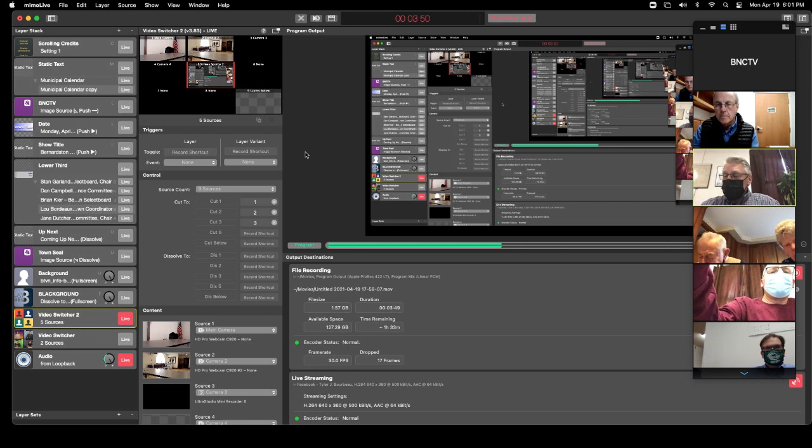The purpose of tonight's meeting is to go through and explain real quick what the plan is for a new fire station, and to update people on what the process will be going forward through town meeting. Hopefully we can get participants to show up to voice their concerns, and maybe even tonight have participants voice their concerns and let us know what they're thinking.

I believe we've worked diligently on trying to get a plan to put forward for the town. What we're going to present tonight is the proposal we feel is our final, best effort of trying to get a new fire station, as well as using the existing old fire station. With that, I'd like to turn it over to Brian De Vriese to update us on what he has.

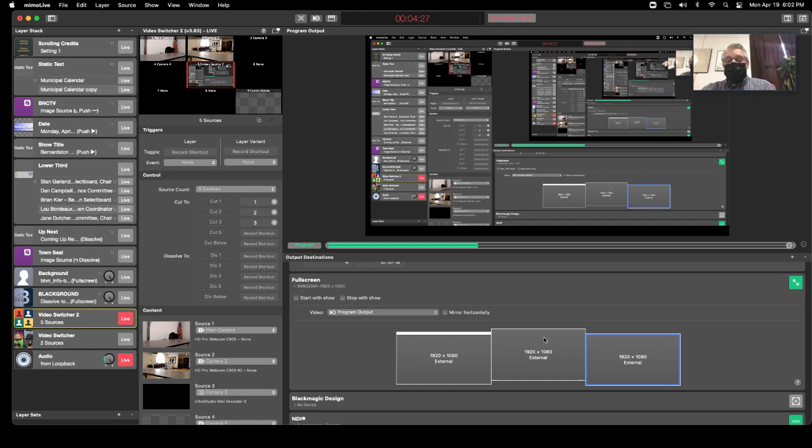The buildings are separated by 30 feet because there's a culvert, an 18-inch culvert pipe, that runs between the two buildings and diverts the stream across Church Street into the stream on the other side. This scheme utilizes land owned by the town, so there's no additional expense for purchasing land.

Among those mitigation measures are planting wildlife habitat and removing invasive species, which would be done on the property across Church Street. If you look directly from the garage doors in the old station across the street, you'll see a parcel of land there, and that's where the mitigation would take place.

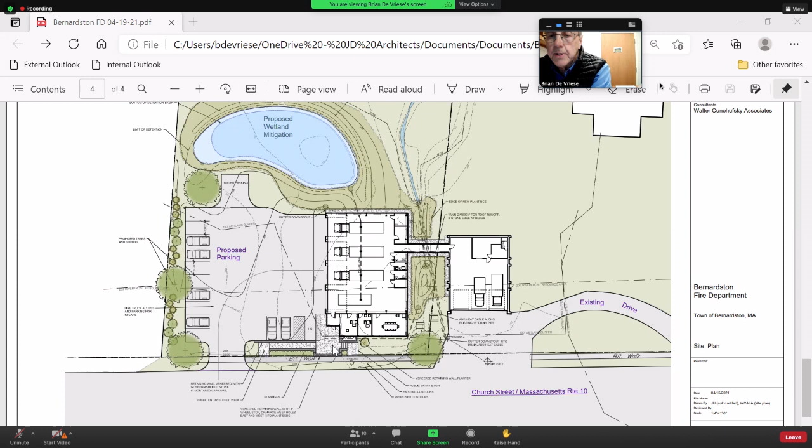Before I go, there was a question about needing a ramp to enter this station because it's raised. We have about a 3% slope here in this area, which would satisfy the need for a ramp. Then we have a stair from the existing sidewalk to a landing, and another stair up to the entry area of the existing building.

There's a retaining wall around this raised landing we're proposing. It would be a Goshen or Ashfield stone veneer on a concrete retaining wall - a short wall, only 2 feet high here at the sidewalk.

That would allow a wheelchair to get in there - you'd go up the walk to this area, and that's a 3% rise, so you don't need any handrails on that. It's a very gentle slope.

There's a handicap parking area right here near the entrance to the building. The entrance goes in right here - there's a foyer, the dispatch office, the chief's office, and a conference area. The conference area is 24 by 16.

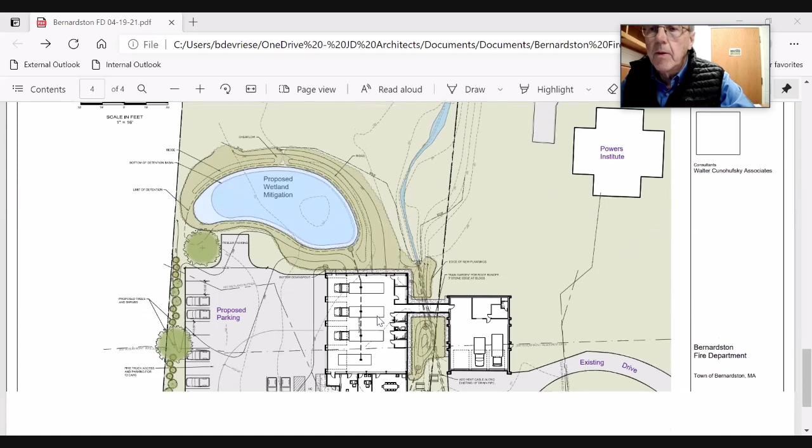I'll start with a plan. Okay, so we have the new station here, here's the ramp. We have the HVAC room, tool room, toilet room, laundry, another toilet room, and a shower. In this area, I'm proposing turnout gear, but it can go other places too.

We have 4 bays. There's a large rescue trailer that needs to be housed undercover, so this is a good opportunity to house it. I'm proposing that the brush truck and squad truck—well, the chief suggested parking the squad truck and the brush truck over in the old building.

This is the foyer we were just talking about, dispatch office, chief's office, and conference. We're leaving the existing fire station as is.

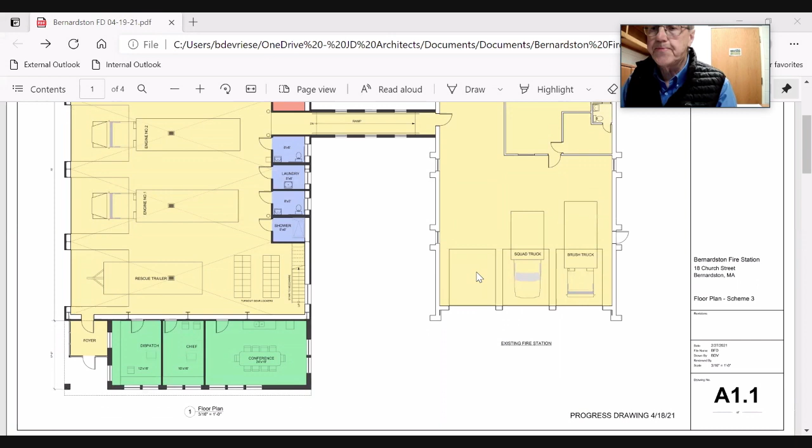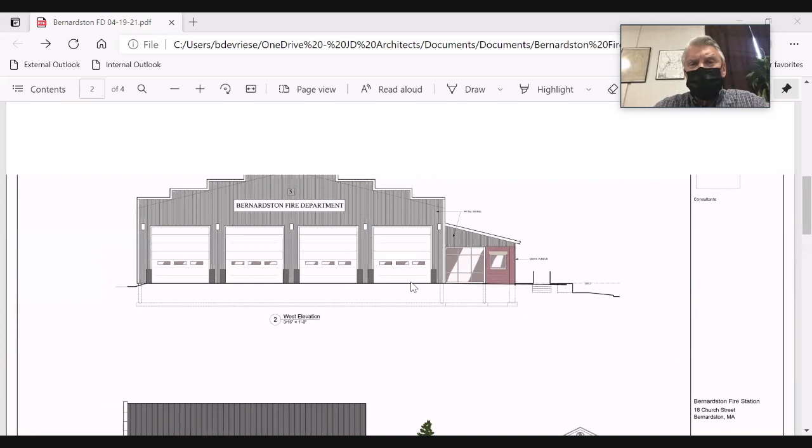Going back to the front of the building, there was discussion on the roof line of it. People didn't like that cut out. I just want like a gable. Yeah, that's a matter of preference, and that discussion can come in the final design.

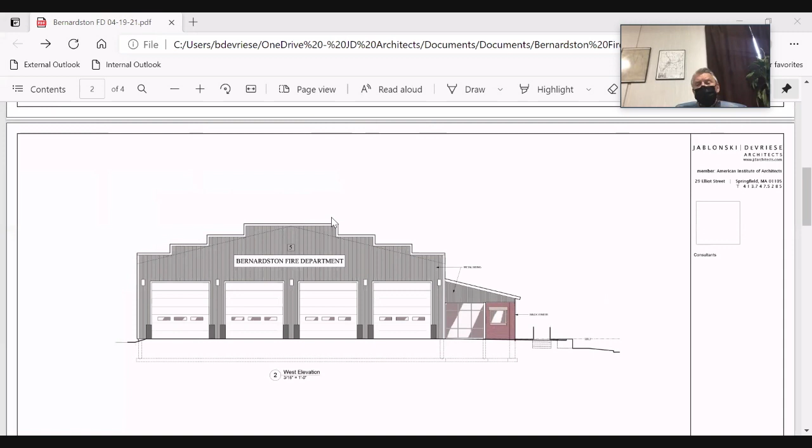This is a feasibility study, and this is a suggestion of a way of making it an interesting looking facade rather than a straight gable. So the people could decide at a later date how they'd like to have that look. If the majority opinion is against that, then that would change. Okay, very good.

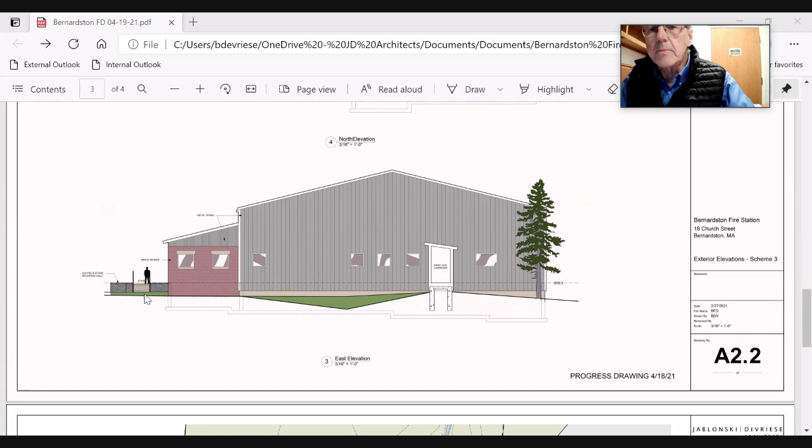So that's briefly what it's all about. I think the advantages of this scheme are that it uses the existing fire station, it uses existing town-owned property, and it keeps the fire station in the center village.

Do you have any updates on cost for us with everything that's been going on? Well, no, I don't. I've got some calls into contractors to see what's happening. Mostly it's materials that have gone very high during this pandemic, and also some price hikes are the result of the tariffs that were enacted a couple of years ago. But I think once the pandemic is over, the pricing will settle down again. Right now it's kind of volatile.

I don't believe it would affect—the next thing you have to do is secure the services of an owner's project manager and a designer. I don't think the cost of those services would be affected by the pandemic. It's just material prices right now that seem to be going crazy.

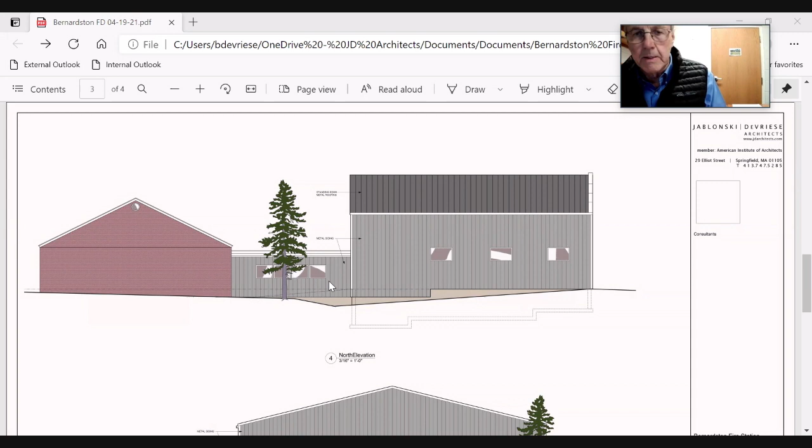Could you explain to us what type of person that should be, or who it should be? Well, this person is generally a contractor. A number of contractors offer these services—I know DA Sullivan does, and there are some companies that specialize just in the role of owner's project manager. It's something a general contractor—well, you can get qualified to be an OPM through a program, but there are quite a number of them around.

Are you qualified? I am not. I could be qualified, but I have not taken the course, I have not done the coursework in that. Okay, there may be people in town that are qualified to do this, or could look into it. I can make recommendations on OPMs too, if you need that.

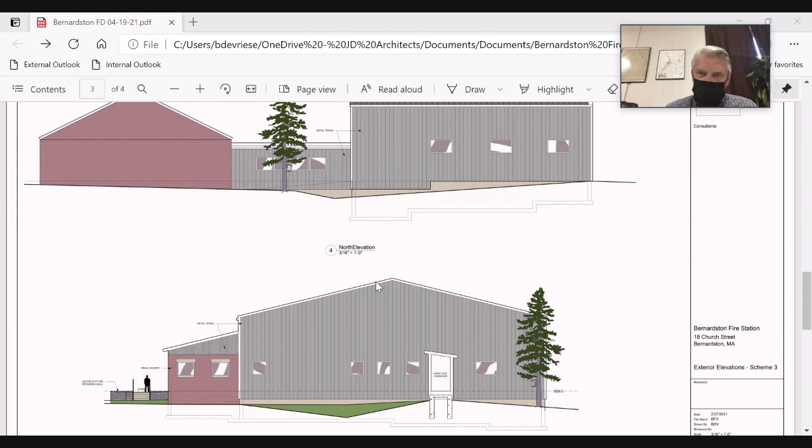So what we haven't completed on this plan here is the septic. Is that correct? That's correct. Now, we could use the existing septic if we put a pump up. Am I correct in saying that?

Well, if it turned out that you failed your Title V inspection on that existing system, then you might have to look for an alternative, like pumping up to the senior center. I think you mentioned that earlier. Yeah, that would be a more expensive proposition. Okay, sounds good.

Now, going forward, the notice of intent. Yes, you've been working on that. I have. That's contingent on completing this plan, which shows a greater coverage of building. I mean, there's more of this building in the riverfront area, so that has to be compensated for.

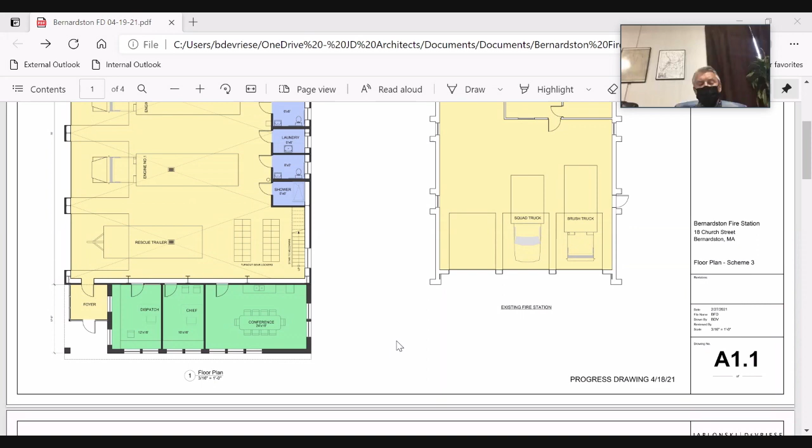Bill Luttrell is working on the notice of intent narrative, and we have to get a stormwater management plan developed too, which I was going to reach out to a civil engineer on. Walter Konofsky did the site plan and all the grading work on this design, but he prefers not to do the DEP forms and applications.

Would there have been a stormwater plan done previously with the plans that we had somewhat done years ago? I don't know how far you got with them, but I assume not. I don't think you would have done that until you actually started to move into the final design work. That's what I was thinking, but I wanted to be sure because I heard somebody say they thought that was already done. No, I don't think so.

I didn't see any evidence of that. And it would be contingent upon what plan you develop, like the amount of hard surfaces you're creating and how much volume of water you're going to have to manage. So I don't think it would have been relevant anyway. You'd have to redo it, even if it was done. But I would tend to doubt that anything was developed that far.

Okay, is there anybody in the audience that might have a question for Brian? If you do, just speak up and we'll hear your question. Okay, hearing none. What else do you have, Brian?

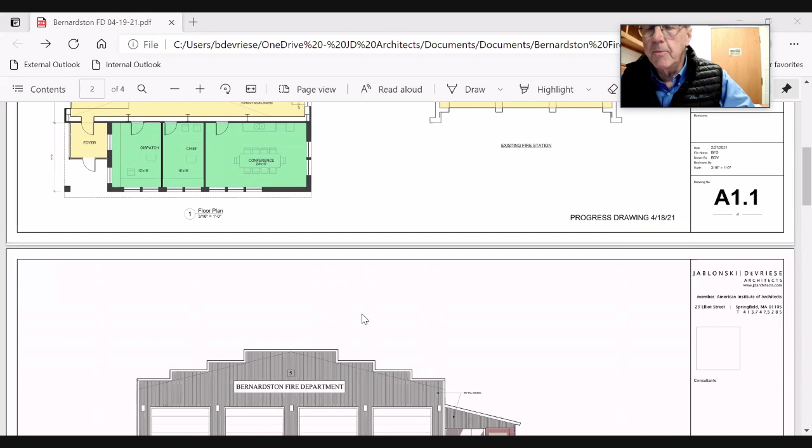I don't have anything. We're continuing work. The next thing I'm doing is moving forward with the stormwater management plan, and any feedback I get back from you or the fire department, I would take into consideration on revising the plan or explaining anything that wasn't clear.

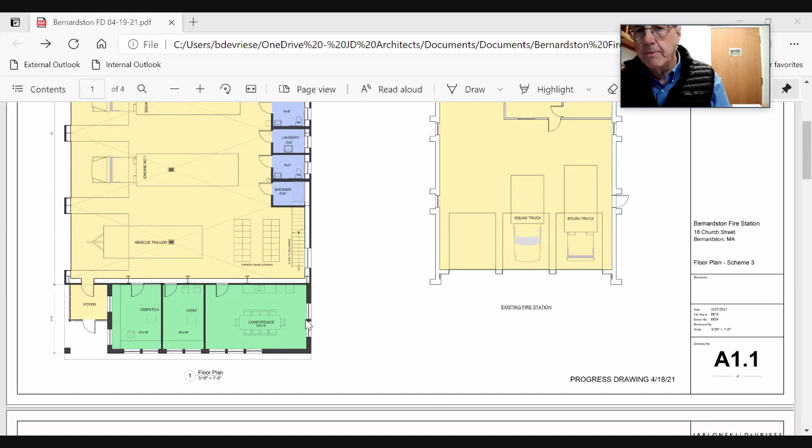Also, the cost figures are pre-COVID. I did escalate them for the addition of the administration area, but they don't really reflect the COVID impact on material prices.

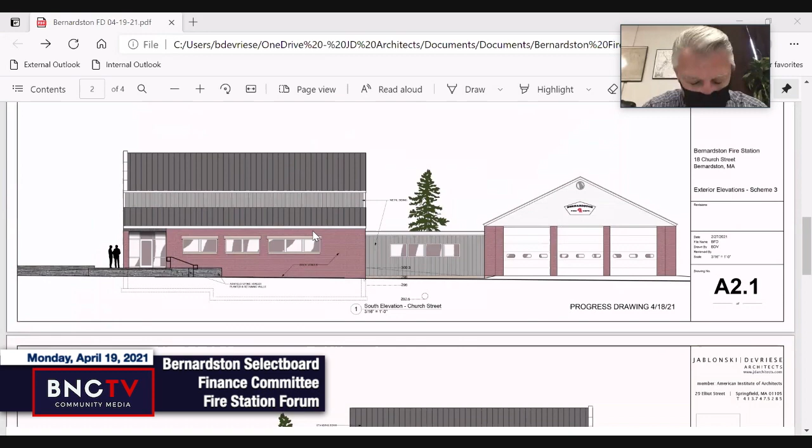Okay, is there anything in this plan that we could use COVID relief money for that you could think of? I can't think of anything. I mean, it's possible that there's certain equipment the fire department might need that could be supplied by that, or you might want to look at a generator.

Yeah, so we definitely want to look at a generator. We feel that's pretty much a must-have. That's not a need, but a must. So we definitely need to look at that.

Now the solar panels, again, we could do something with that later, or during the construction, correct? That's correct. If you intend to add solar panels, your electrical service may be impacted. So you probably want to prepare for the addition of solar panels in your design anyway, for your electrical.

Okay, we're trying to move forward a little bit quicker than we have in the past. We have a meeting planned for May 6th, a Thursday night at the barn at Kringle Candle. And at that meeting, we're going to present it to the public for a vote to see if they would go along with this proposal, and if not, to see what they would go along with. Okay, so we'll have to get that word out.

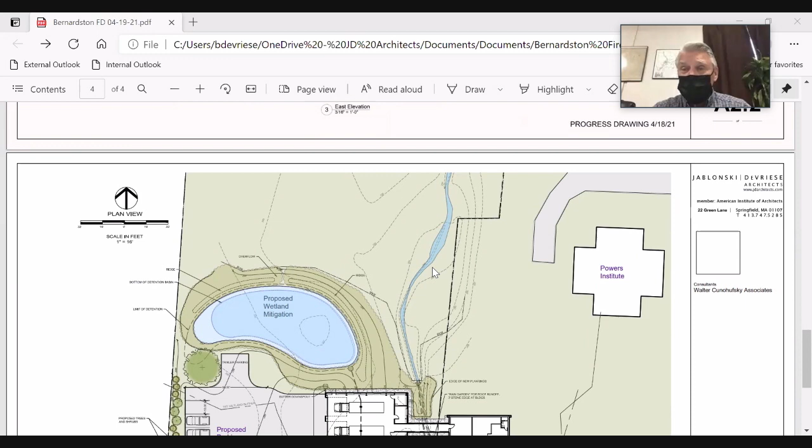The presentation that you presented tonight would be great at that meeting, because I think you explain a lot of stuff that we would probably miss as you went through the different drawings. So I think if you could attend that meeting that night, I don't know if that's possible for you. I think I can do that. I'm just checking the calendar right here.

We're really trying to get the townspeople to get involved, to get behind us, however they feel, but to turn out so we can bring this project to an end one way or the other.

That's our hopes. Looks like I'm clear on Thursday night. So what time was the meeting? 7 o'clock. Yeah, I'm good for that.

Are the select board members or anybody else in this room have anything else for Brian? No. I got one question. Pete Shedd's got a question for you. Sure.

I don't want to change the layout, but I just wonder, would it be better to swap the bathrooms and shower with the area where the HVAC and tool room are? Sure, I don't have an issue with that. It'd make a more direct route connecting to the septic system. That's certainly possible. I don't know if there's any requirement on how far away the bathrooms have to be from the office areas or anything like that. I'd have to check the plumbing situation.

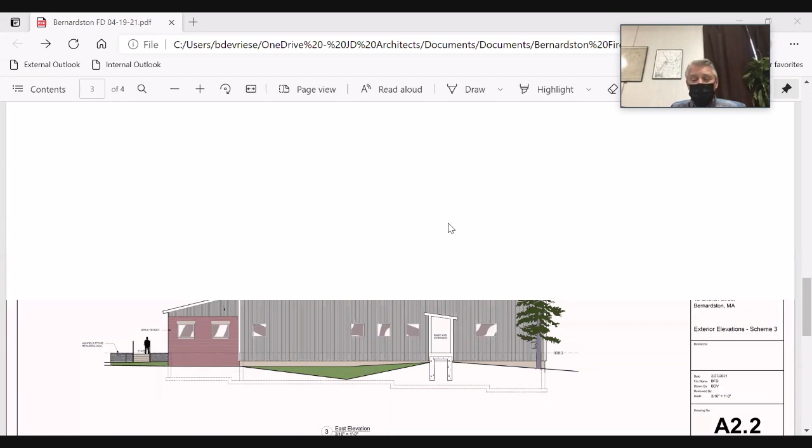Peter, I'm going to turn it over to you for a minute to see if you want to explain to the people the need for this, what we've been trying to accomplish, how you guys are working now, and how this will at least improve what's going on at the current time.

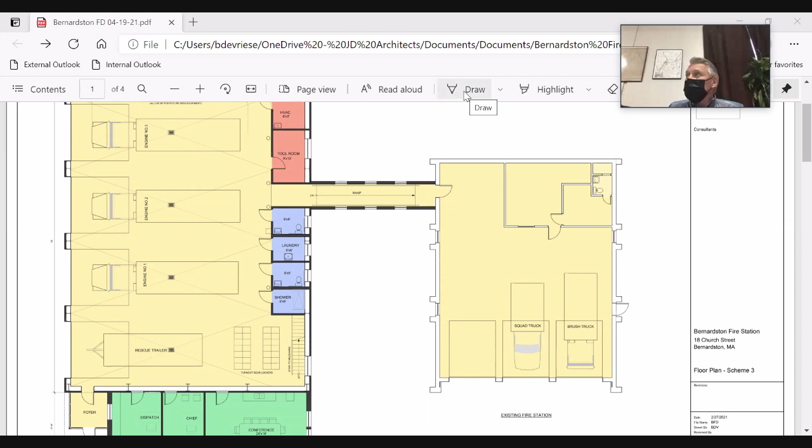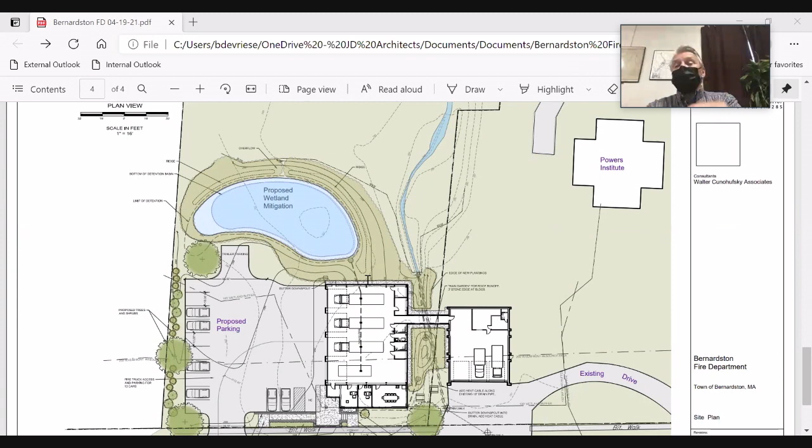Okay, hope everybody can hear me all right. The biggest issue so far has been space. In many ways, we're looking for a safe area and space that the firefighters can move freely around the vehicles, entering the station and moving around the vehicle. It's very tight and cramped in the existing building. The new building opens up far more space around the vehicles, making it far safer for exiting and getting in and out of the vehicles. It gives more space for people donning their gear before getting into the equipment.

And the other thing is space. I mean, look at our existing building, we literally have no closet space, storage space, or anything else. So we're greatly opened up and given a lot more space to do that in safe operation. Again, cleaner and neater operation.

The only other bigger issue is when the station was built in the early 70s, we were responding to like 30 to 35 calls a year. Now in the last 3 or 4 years, we've been consistently over 300 calls per year. So the call volume has definitely grown over the years, and the trucks have grown over the years.

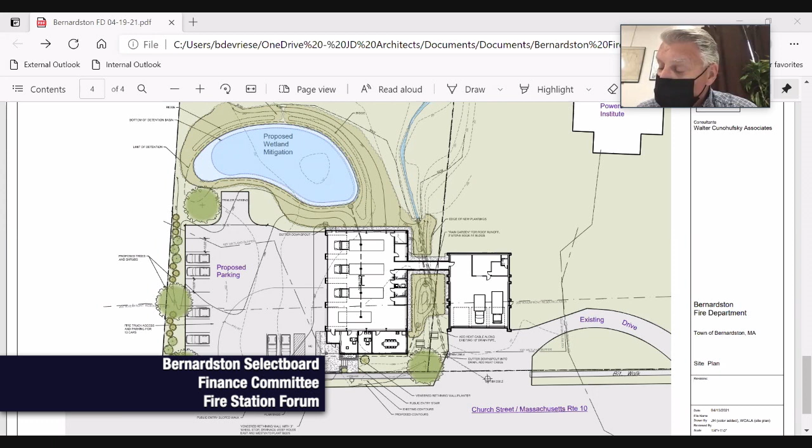When this current station was first built, the main truck they had at that time was a 1952 Ford with a 500-gallon tank on it, which at that time was huge. Nowadays you have brush trucks that carry 500 gallons of water, so for structural firefighting that is far gone. Our smallest truck now has 800 gallons, and the other trucks have 1,000 and 1,250 gallons of water. So the trucks have gotten bigger to carry the water and the added equipment.

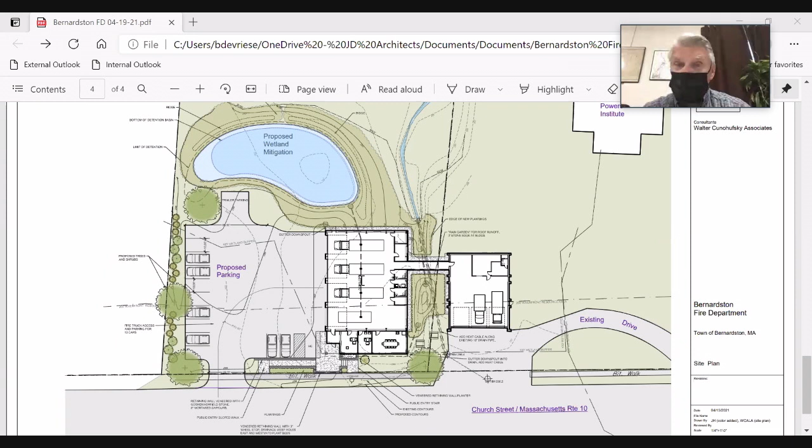The progress of fighting fires has definitely changed in the 40 years since the other station was built. In the old station, when we want to build or buy a truck, we have parameters, and that's the size of the building, so you have to build a truck that's going to fit in the building. Going with a new building gives you a little bit more leeway, a few more options.

The other thing that I really like about this new building is it gets the trucks away from Route 10. A little safer area when you come back and you're laying your hose out or washing your hose equipment, you're away from the roadway. On the existing station, when you roll the hoses out, they're quite often right out into the breakdown lane, which makes it a dangerous situation for firefighters cleaning up and repacking hose. Again, when the trucks pull in, they'd be taking a right-hand or left-hand turn off Route 10 into that parking area, with no backing into the station, which has been an issue in the past. We have to watch out for vehicles swooping by as you're backing in and out of the station.

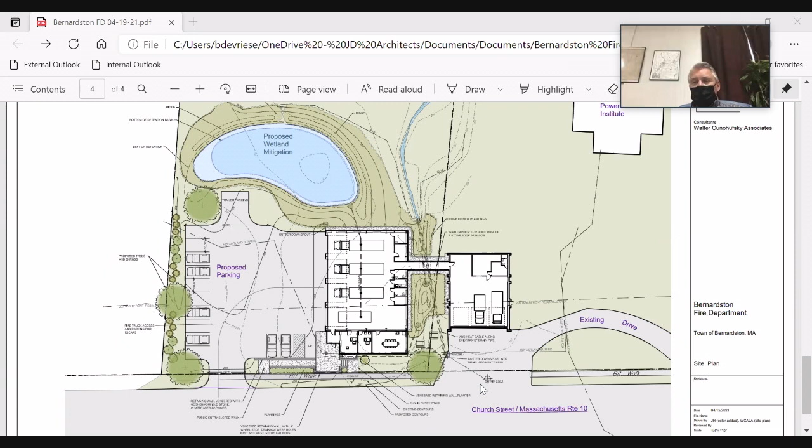So that's all I have to talk about tonight. Brian, you have anything else? Chief? No. Okay, does anybody out there have any questions or comments for us? Be glad to hear anything.

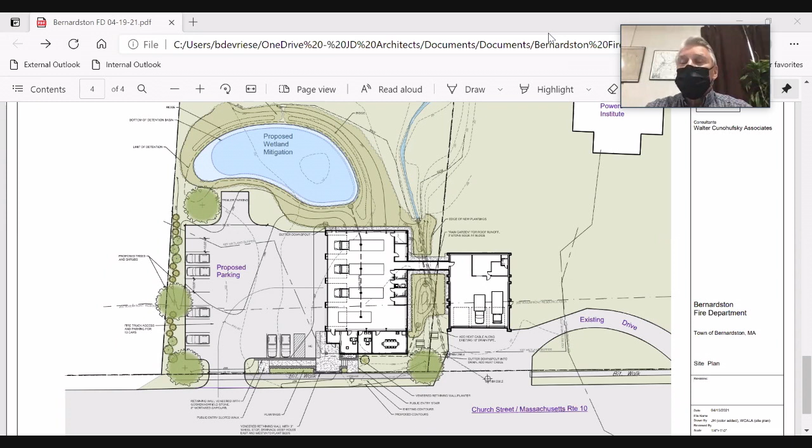Lou, are you, Stan, are you going to need me? Yes, I hear you. So this is Chris—are you going to need me to go over the bylaws? Are you going to be working on those tonight? Chris wants to know if we're going to go over the bylaws. We're going to try to get through things tonight. Okay, well if you have questions, I can come down. Okay, very good. You don't have to come down right now. If we need you, we can give you a buzz. Okay, sounds good. Thank you. Thank you, Chris.